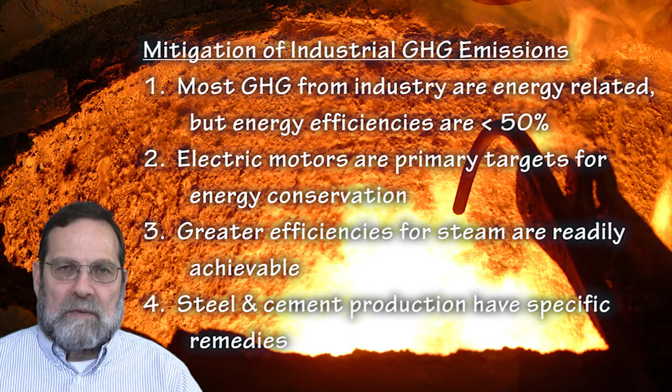Industrial emissions of greenhouse gases, if one includes emissions from electricity and steam generated off-site, amounts to 3.3 billion metric tons of carbon equivalents per year. Industries with the highest emissions are A, metal smelting, especially steel, iron, and aluminum; B, extraction and refining of petroleum;

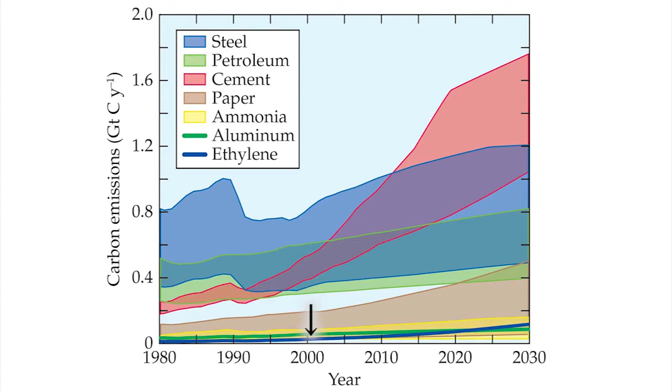C, cement manufacture; D, pulp and paper processing; E, industrial nitrogen fixation to generate ammonia; and F, synthesis of ethylene, a precursor of many plastics. As the human population and per capita income have grown, so has production of industrial goods.

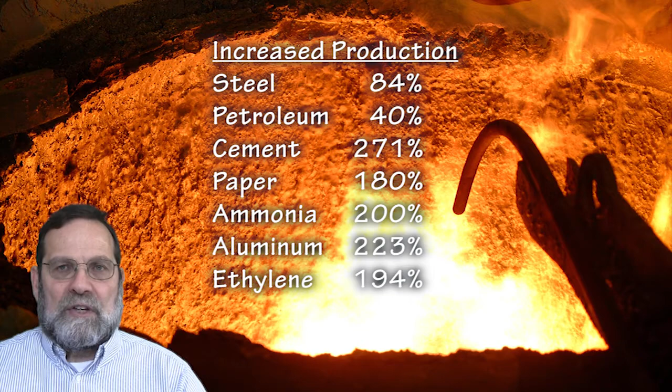Since 1980, global annual production of steel has increased 84%, petroleum 40%, cement 271%, paper 180%, ammonia 200%, aluminum 223%, and ethylene 194%. The industrial sector, however, has not expanded as quickly as some other sectors, such as transportation. And actually, the industrial share of greenhouse gas emissions has declined from 40% in 1971 to 37% in 2004.

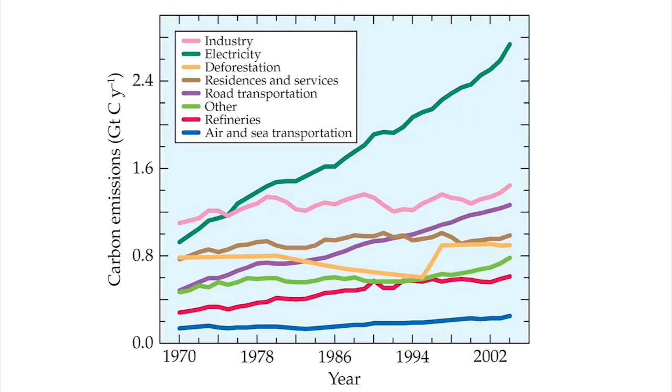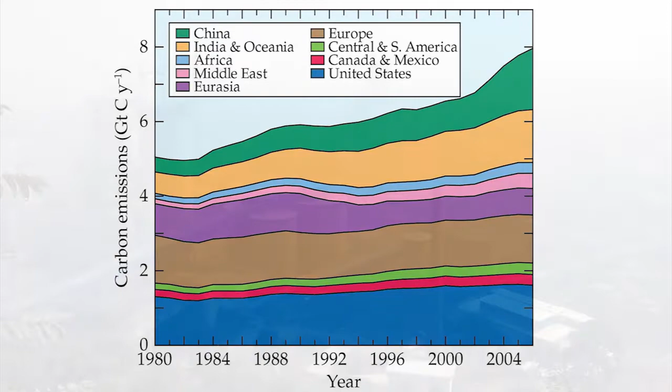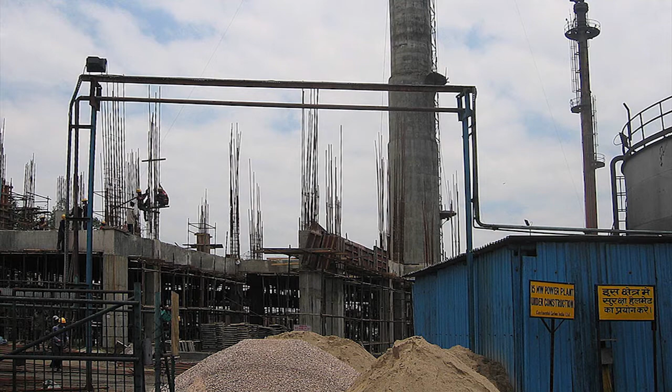Many heavy industries have relocated from developed countries to developing ones, such as China and India. Indeed, industrial greenhouse gas emissions from China and India rose from 12% of the world's total in 1971 to 42% in 2004. Because expected lifetimes of manufacturing equipment, power lines and pipelines, and power stations extend from 10 to 50 years, industrial facilities under construction now in China and India will influence emissions for decades to come.

Over 80% of the greenhouse gas emissions from industry are energy related, yet energy efficiencies of most industrial processes are less than half of what is theoretically achievable. Increasing energy efficiencies in the industrial sector thus presents an excellent opportunity for diminishing greenhouse gas emissions as well as saving money. Strategies to achieve this include upgrading equipment, optimizing operating procedures, improving equipment maintenance, and maximizing capacity utilization.

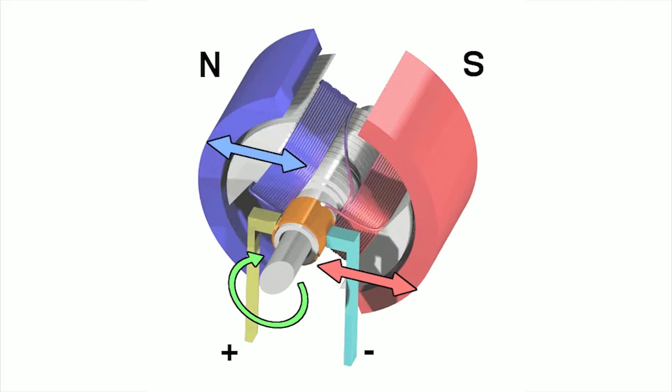Most industrial equipment, including pumps, compressors, fans, and conveyors, contain electric motors. These motors consume more than 60% of the energy in the industrial sector. Therefore, the motors themselves, their controls, their transmission systems are obvious targets for energy conservation in the industrial sector.

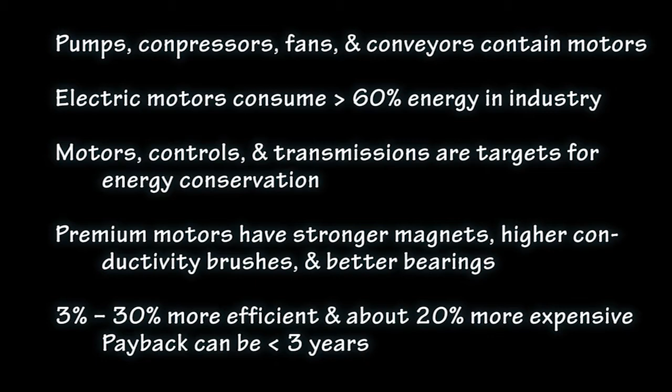Premium motors have stronger magnets, higher conductivity brushes, and better bearings than their standard counterparts, and are 3 to 30% more energy efficient, but about 20% more expensive. In industrial applications that run motors for extended periods, the lower energy requirements of premium motors compensate for their higher purchase price in less than 3 years.

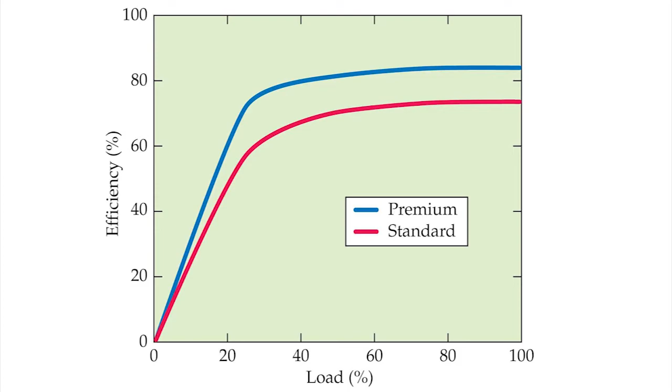Motors operate most efficiently when loaded at between 75% and 100% of their capacity. Electronic adjustable speed drives vary the frequency and voltage of the electricity supplied to a motor to control its speed. Adjustable speed drives are expensive, costing roughly the same as the motors they control. Yet under variable loads, they improve energy efficiencies by 10 to 20%, and the energy savings quickly compensate for higher capital costs.

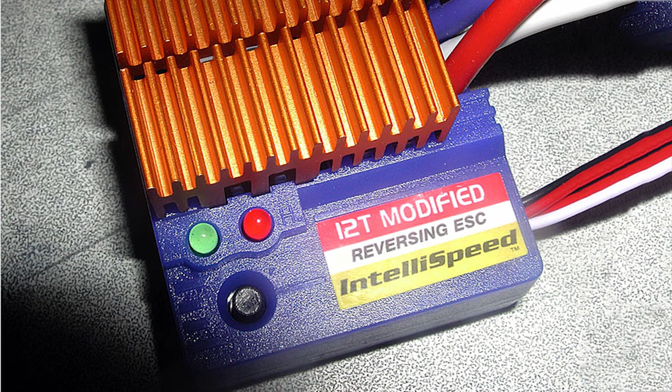Transmission systems connect motors to their loads via belts, chains, or gears. V-belts are the most common type and may reach efficiencies of 95% if properly installed and maintained, but typically have efficiencies of less than 90%. Replacing V-belts with cog belts or gears increases energy efficiencies by an average of 4%. In some circumstances, an adjustable speed drive permits a direct connection between the motor and the load, eliminating the need for a transmission system.